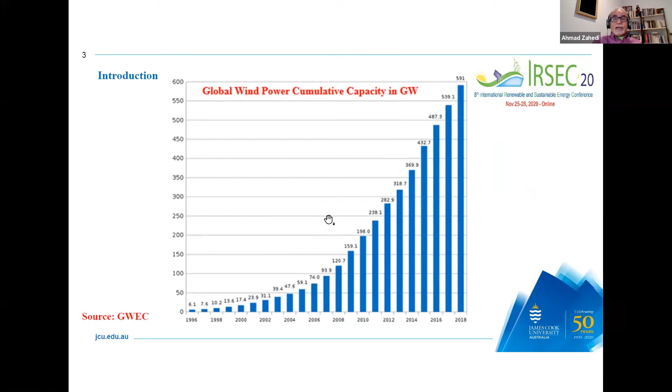And there are some countries that are more active than others. For example, China is very active. In the past few years, Germany and the United States were the two countries on the top of the list of using wind power, but now China is on the top of the list, and they have installed a lot of new wind farms. And I have to mention here, I think that China has gone very fast.

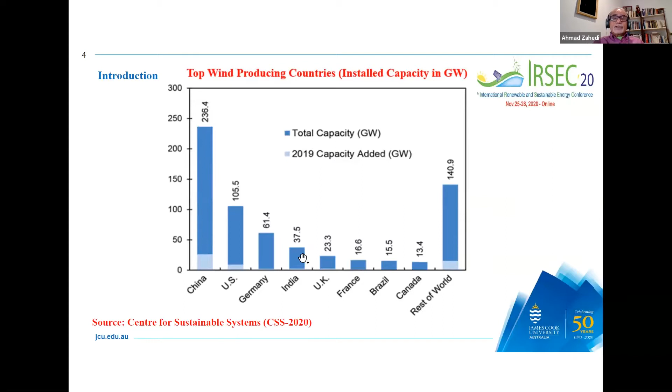The reason for that is I have read some reports from international organizations that some of the wind farm projects are not operational because they have been very fast in construction, but not fast enough to upgrade the electricity network to be able to absorb electricity from wind power. That is just a comment I have heard from one of the international organizations, but I'm sure they will probably fix this issue. And these are the top countries that are very active in using wind energy.

When we look at the price, comparing the electricity price from wind power with other technologies, it is really cheap, provided that the location site is carefully selected. Also, there are a huge number of wind turbines available from different manufacturers, but it is important to find the most appropriate wind turbine for a selected site.

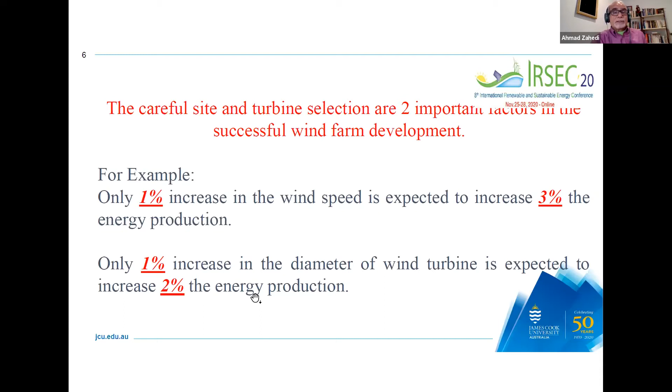And I want to draw your attention to this: carefully choosing the site and also a suitable wind turbine is very important. As an example, only a 1% increase in wind speed is expected to give a 3% increase in energy generation, and a 1% increase in the diameter or size of the wind turbine will increase energy production from the wind farm or wind turbine by 2%. You can see how important a factor this is in choosing.

And math tells us that the power in the wind is related to a couple of factors, and I want to draw your attention to two of them, which are very important. One of them is the speed of wind: the power is proportional to the wind speed to the power 3. And also the area swept by the wind turbine blades. That's very important, as we will see.

And according to this equation, if one wind turbine is installed at a location with, for example, 4 meters per second, and the same wind turbine is installed where the wind speed is 8 meters per second, just twice, the amount of power will be increased by a factor of 8 because of the wind speed to the power 3.

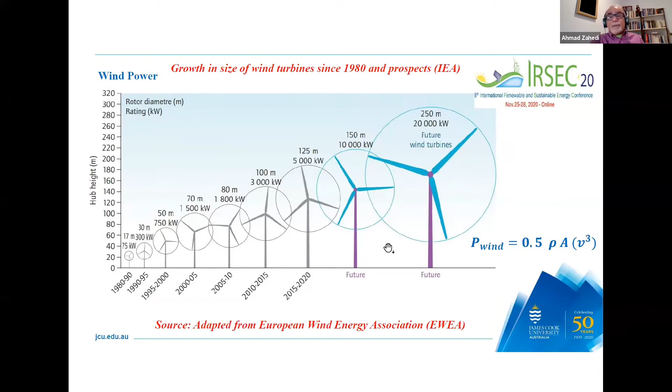And the other factor is the size, because again, the power in the wind is proportional to the area, which is pi r squared. That is why wind turbine manufacturers are making them bigger and bigger, because they want to increase the area to maximize the power.

And as I mentioned before, a huge number of wind turbines are available worldwide. There are more than 40 large wind turbine manufacturers in Europe, in China, in the US, in India, in Germany, everywhere. There are more than 15 countries worldwide that are very active in making wind turbines.

But someone who wants to invest in wind energy, in a wind farm, wants to know which one is suitable. So many options, so many wind turbines available, but which one is good? And so I want to share with you some of the factors that are important for a wind farm developer or investor, or anyone who is interested, in making a wind farm project successful.

One of the weaknesses of wind power is its efficiency. It's relatively low efficiency. Its minimum is 20; anything below that, forget it. You know, if a wind farm is working at an efficiency under 20, it's the wrong place, wrong wind turbine. And the maximum theoretically is 59, but unfortunately it is not reachable.

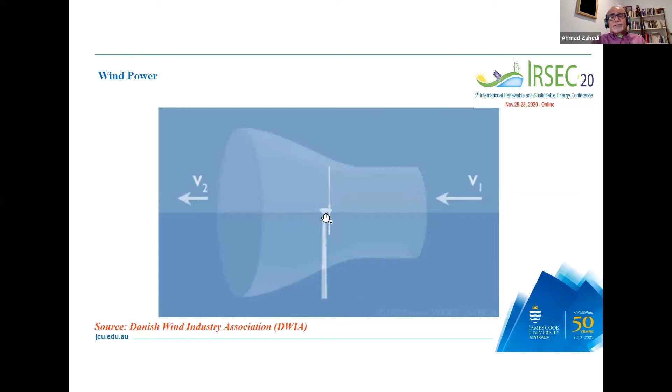So a wind turbine is not able to minimize the amount of energy that wind has when it is leaving the wind turbine. It is impossible for a wind turbine to stop the wind after it has recovered or captured the energy. So this is one of the reasons that efficiency is very low, and the maximum theoretical efficiency is 60% for this reason.

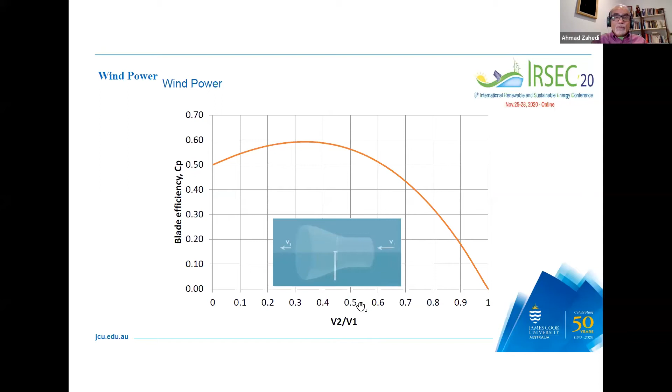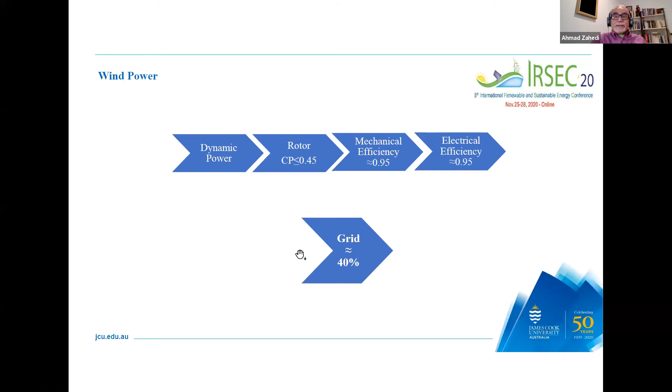So this actually depends on the ratio of the speed of wind moving away from the wind turbine divided by the speed of wind moving toward the wind turbine. So these are the reasons that the wind farm is considered a low efficiency technology for electricity generation. But it has many other advantages that make it so popular and so economical to use.

Another reason for low efficiency is because in the conversion of energy from wind energy into electricity, there is more than one step. One step is conversion of wind energy into mechanical power, and the second one is mechanical power into electrical power. But the second step is very efficient. These days, manufacturers make very high efficiency generators to convert mechanical power into electric.

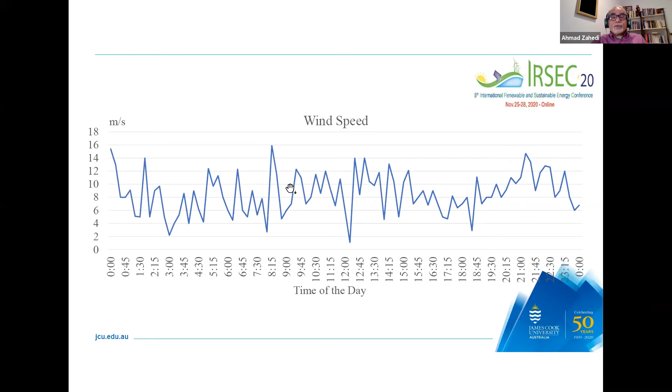And the other problem is the wind is not constant. The wind speed is not constant. Power companies hate to see that. But the technology, which is not the focus of my talk, is available to improve this weakness of wind power. Now, from an engineering point of view, we would like to do the performance prediction, site selection, wind turbine selection. We have to do some engineering job.

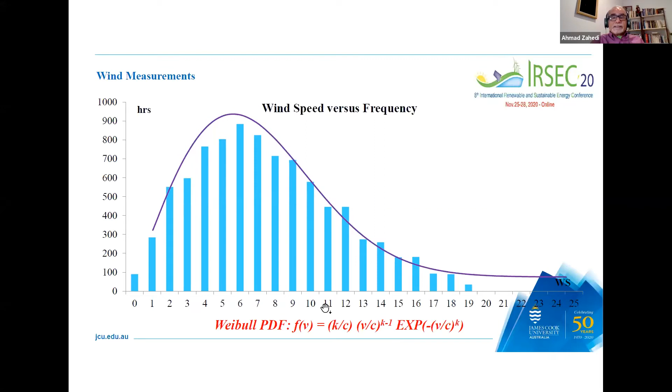And it is very close to the equation this Swedish mathematician invented, which depends on many factors. But from the wind power analysis we are not interested in those factors. We try to find the most suitable one. Look at this equation: because of the factor here, this factor makes a different shape, a different curve, and so on.

This is for C equal to 8, and the reason I have chosen C equal to 8 is because it is very close to a realistic annual average wind speed of 7.1 meters per second. So you can see the shape will be different, but for our analysis we are interested in the one which is very close to the experimental one, which is this one. And we can use this Swedish invention, this equation. I don't need to explain how to get this one.

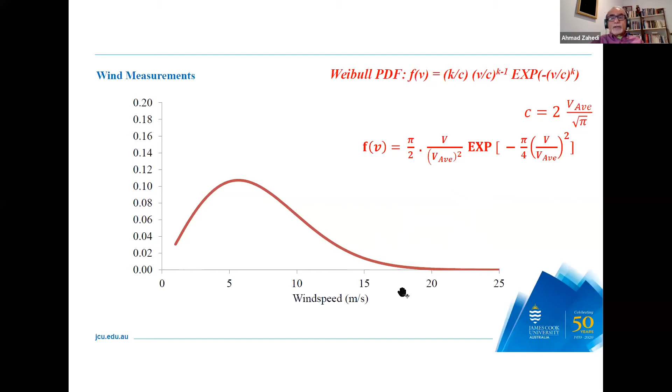But as you can see, this is the probability of wind speed depending on the annual average wind speed at any location, in Morocco, in Australia, in Europe, and you can estimate the probability of any wind speed from 0 to 25. The probability of very high wind speed is out of interest. So it depends on location. For example, Morocco is not a windy country. Some places have a very low wind speed, say a little more than 5 meters per second as annual average. This would be the probability.

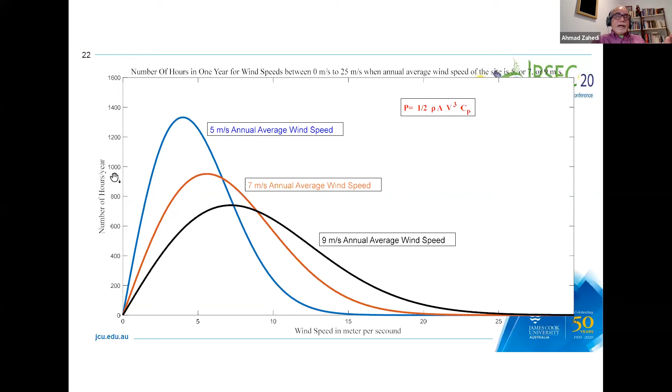And when we move to a windier area, where wind speed is 7 or 9, like the south of Australia, which is more than 9 meters per second, the shape and the probability will be different. Then the probability multiplied by the number of hours in 1 year, which is 8,760, gives you the number of hours in 1 year of any wind speed. This is very important for us as renewable energy engineers, to find the actual power from the wind turbine, and to play with the factor to maximize it.

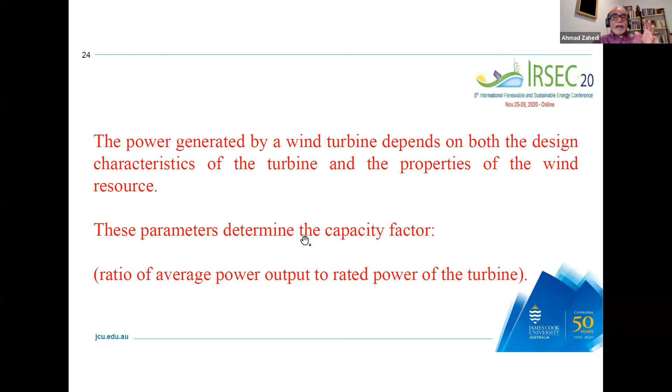One of the important things from the researcher point of view, the investor point of view, or the wind farm developer is capacity factor. Capacity factor is the ratio of the actual energy generated in 1 year by a wind turbine or by a wind farm divided by rated power.

And I'll tell you something. What is very confusing is wind power or the size of wind turbine. When the manufacturer says a wind turbine is 2 megawatts or 1 megawatt, it doesn't mean that the 2 megawatt wind turbine can generate more power than the 1 megawatt wind turbine. So this is a little bit confusing, but we can actually try to find the best wind turbine for the best location.

When you look at the specification of any wind turbine manufacturer or wind turbine model, they give you this curve. It doesn't matter if you visit Vestas, the Danish wind turbine manufacturer, or a Chinese one, they talk about this curve. They're not interested in very low wind speed, because when wind speed is very low, usually the wind turbine doesn't operate, because the cost of maintenance is more than the energy the wind turbine can produce.

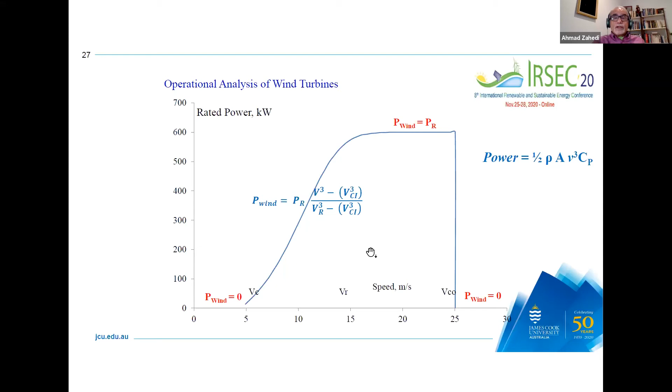This figure here shows you that, as I mentioned before, when we look at the specification of a wind turbine, it says 2 megawatts, 5 megawatts, or 3 megawatts, but the manufacturer gives the rated wind speed as well. When the manufacturer says 2 megawatts, it means at a rated wind speed of 14 meters per second, the wind turbine can generate its nominal or rated power.

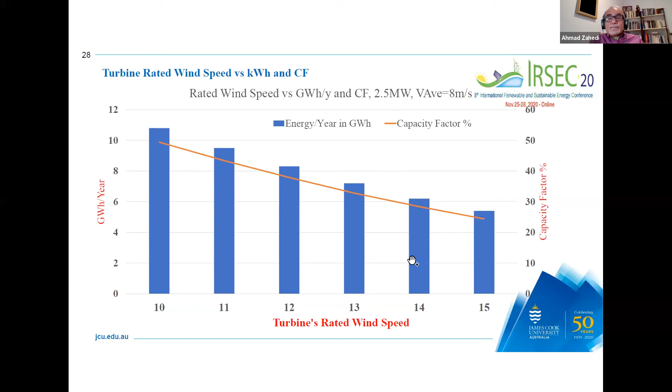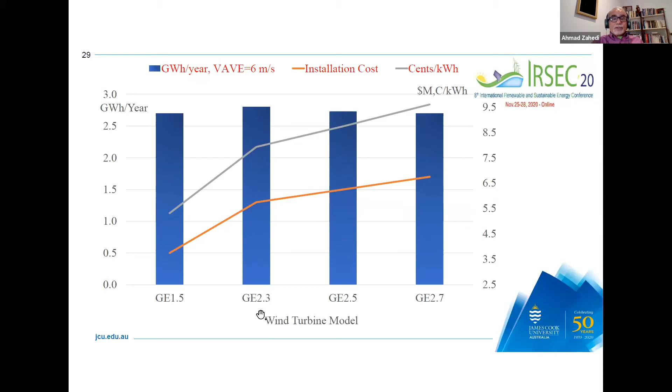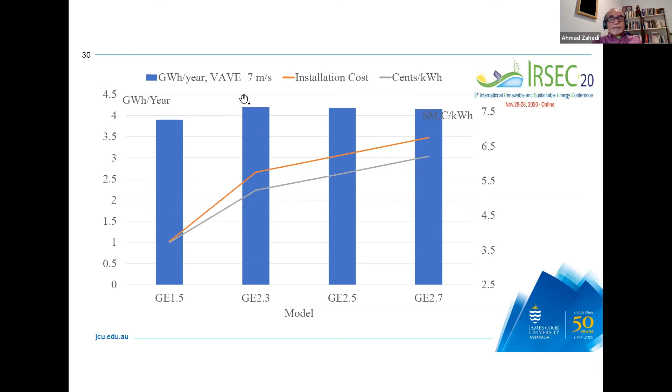And as you can see, for the generation or the cost, the same wind turbine has been installed where the location has 7 meters per second, and also continued for 8. And as you can see here, this 1.5 megawatt wind turbine was very suitable for low wind speed, but now is not suitable for higher wind speed. So it can generate less power.

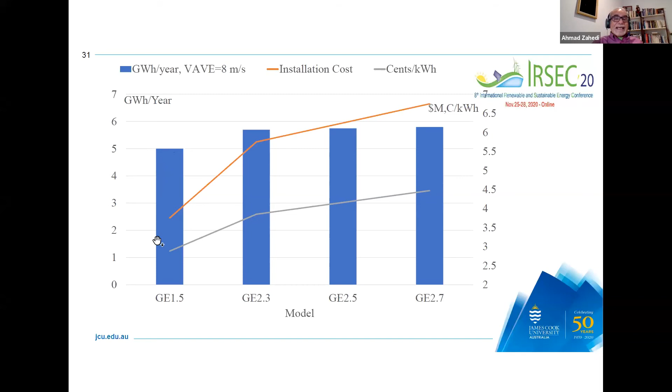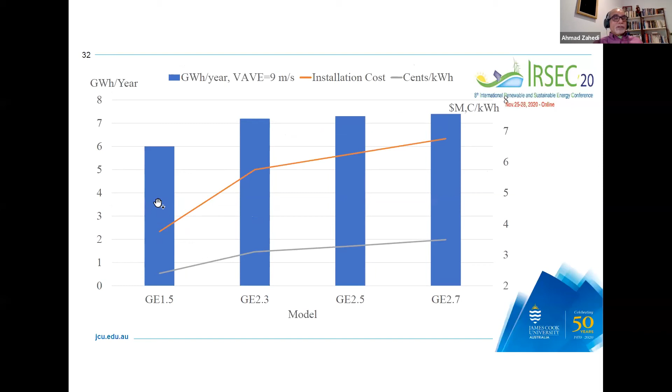So in terms of choosing a wind turbine for a wind farm, for a location, we have to consider this. As you can see, the 1.5 megawatt wind turbine was very good for a low wind speed, but not as good as it was before.

And I want to show you one more example for the different average wind speed. It's one single wind turbine of 1.5 megawatts, that I was showing you before. And this 1.5 megawatt turbine has a rated wind speed of 12. It means when the wind speed is 12 meters per second, this wind turbine can generate 1.5 megawatts of power.

And as you can see, as the annual wind speed is increasing, the generation or the capacity factor is increasing, and the cost is going down. This is the ideal for a wind farm developer or wind farm investor, to try to find the suitable size, location, and the suitable wind turbine.

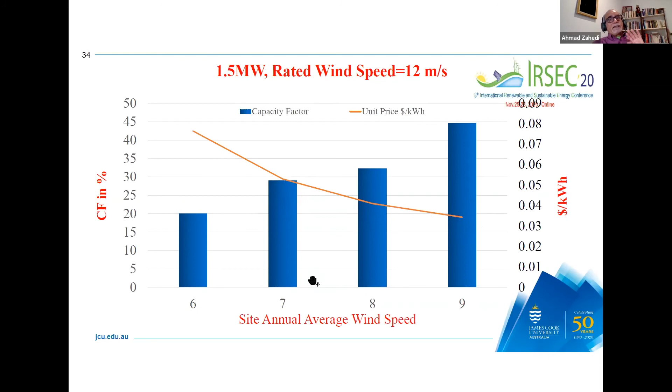One more example, the last example I want to show you, is another wind turbine with 2.5 megawatts, and assume that this is installed at a site that has 8 meters per second annual average wind speed, and the rated wind speed is between 10 and 15. I want to show you how important it is to look at the rated wind speed of the wind turbine. I'll show you with this example, which I have produced using a MATLAB program.

The one in green shows, when the wind speed is 8 meters per second for our location, which can be anywhere, the number of hours per year at that particular location that the wind speed was 1, 2, 3, 4, until 25. And the one on the right-hand side in blue is what is known as the power curve. This is what manufacturers give us. For example, the manufacturer of this 2.5 megawatt wind turbine said the rated wind speed is 10.

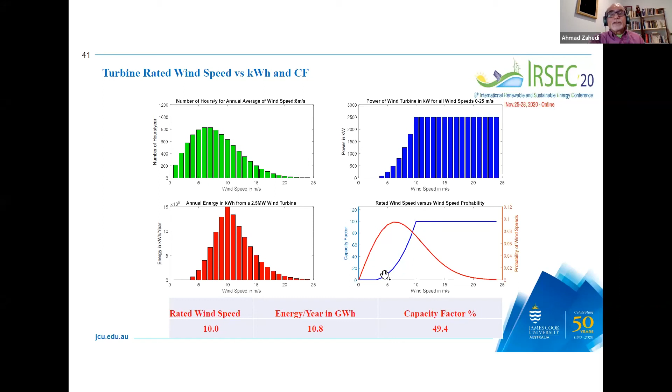And as a final slide, I have done a similar calculation and analysis for one of the places in Morocco. I'm not sure if I am pronouncing it properly, Essaouira, something like this. According to the research I did, this location is a good location in Morocco for using wind energy, with about 7.5 meters per second annual average.

So if that particular wind turbine of 2.5 megawatts is selected for this site, the best would be the smallest rated wind speed, which is 10, which gives the highest energy production per year and the highest capacity factor. If a wind turbine with a larger rated wind speed is chosen, the annual energy becomes smaller. As a result, the capacity factor becomes smaller, and the cost will be bigger. Again, this is just installation cost, for the same place and similar wind turbine with different rated wind speeds.

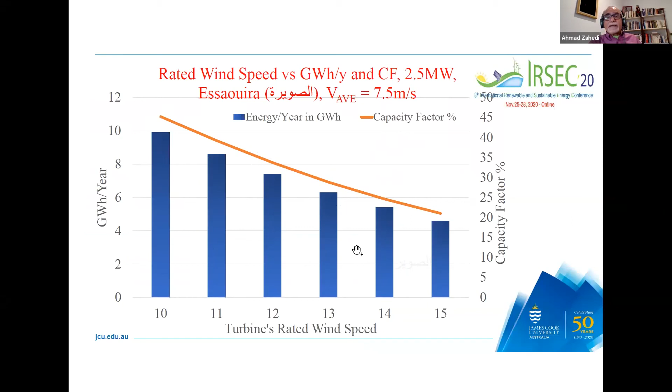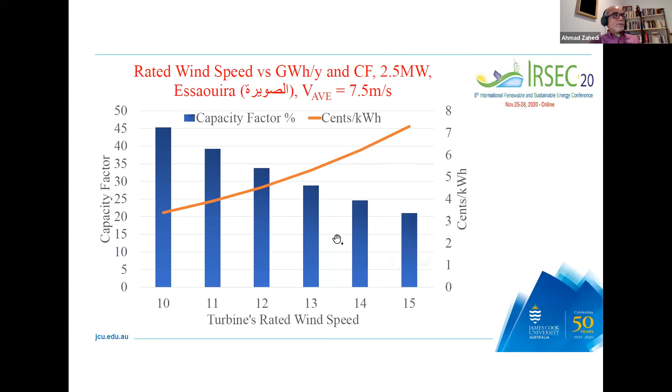I wanted to conclude with this example from Morocco, and I hope that I was able to offer something useful for you. I'm happy to answer any questions if there are any.